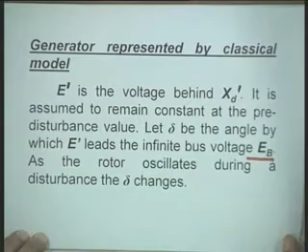Now, for this machine infinite bus system, we have derived earlier the power angle characteristic. Okay. To derive the power angle characteristic, we can start with the terminal current of the synchronous generator as E prime minus E b. Now, here we are representing the voltage behind transient reactance; if it is represented as E prime angle 0, then you can consider this as a reference voltage. Generally, we do it the other way around: we consider the infinite bus voltage as a reference, and the internal voltage leads the reference voltage by some angle delta. Okay. But it does not matter very much.

We can write down the expression for current I t. This is the first step for solving this problem, because whenever we start solving the problem, the terminal voltage of the machine will be known to us, right, and therefore, once the terminal voltage is known, we can find out the internal voltage by this formula: E prime equal to E t0 plus j times x t prime into I t0, where here we denote this total reactance x t as x d prime plus x e.

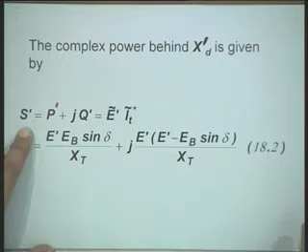Then the complex power behind x d prime is given by S prime is equal to P prime plus j times Q prime. Okay. This is E prime into I t conjugate, right. That is, the complex power is P prime plus j times Q prime, and this is obtained by multiplying this voltage E prime by the conjugate of I t. Okay. When you make these simplifications, you can write down the expression for air gap torque.

Now, we all know that in case we neglect losses, right, then the air gap torque is equal to the power output in per unit system. When you consider the per unit system, the power output at the terminal of the machine is the same as the air gap torque. Okay. And this is our standard power angle characteristic.

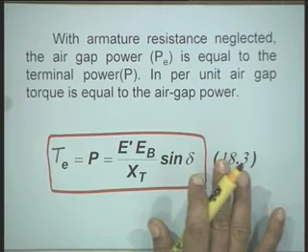Now, at this stage I would like to mention that in case instead of having a non salient pole machine, we have a salient pole machine, right, then the power angle characteristic will be different from what is given here. It will have another term which is known as the reluctance torque. Okay. And one can write down the expression for the power angle characteristic, but this is a primary requirement to start with.

The next step is you linearize the expression for air gap torque around an operating point. Our initial operating condition is characterized by the angle delta equal to delta naught. When you are operating and transferring a certain amount of power, right, the initial value of delta is delta equal to delta naught. Okay.

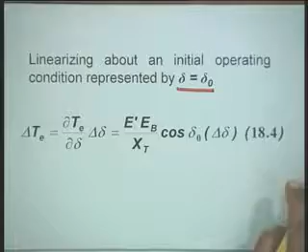The linearized equation is written in the form delta T is equal to partial derivative of T with respect to delta into delta delta, because this expression is very simple. T e is a function of one variable only here. We are assuming E prime and E b constant. Okay. The infinite bus voltage is assumed to be constant, the voltage behind transient reactance is assumed to be constant, the total line reactance is constant, and therefore the torque is a function of delta only, and when you obtain the small change in the air gap torque, delta T is equal to the partial derivative of T divided by delta delta into delta delta.

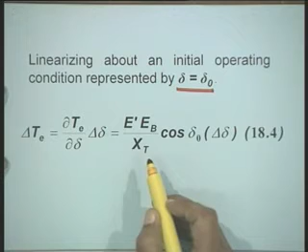Therefore, this partial derivative basically becomes the derivative term itself, right. There is no other parameter on which T depends. Okay. But in case these are also variables, right, then this term is the partial derivative with respect to delta. When you take other terms also, then you have to take the partial derivatives, and there will be so many variables. You have to keep taking all the variables, then you will have delta delta, delta E prime, delta I prime like this. It is actually the Taylor series expansion. We are trying to expand the equation around the operating condition, right.

Now, we come to the basic equations of motion. We had developed earlier the swing equation of the synchronous generator, and the swing equation is a second order nonlinear differential equation. This equation can be represented by two first order nonlinear differential equations. It will continue to be nonlinear. These two equations are written here as p delta omega r equal to 1 upon 2H into T m minus T e minus K d delta omega r, and the second equation is p delta equal to omega naught delta omega r, where delta omega r is the deviation of the rotor speed with respect to synchronous speed, right.

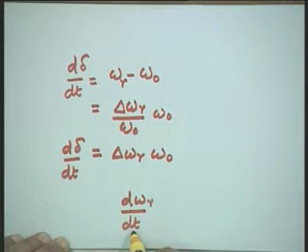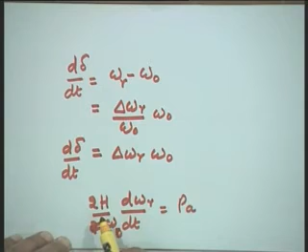See, originally our swing equation is of the form 2H divided by omega naught, d omega r by dt, equal to accelerating power. Now, when I express this omega r in per unit, this term is combined here, so that I have this coefficient equal to 2H only. That is, you write the equation in this form: 2H d omega r by dt equal to Pa. Here this omega r is in per unit.

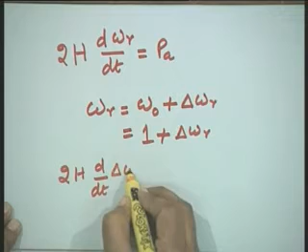Further, omega r can be represented as omega naught plus delta omega r. In per unit, omega naught will become 1, so you can put this as 1 plus delta omega r. Therefore, substituting this expression, I can write the equation as 2H d by dt of delta omega r equal to Pa. Since the derivative of this 1 is 0, d by dt of delta omega r is the same as d omega r by dt.

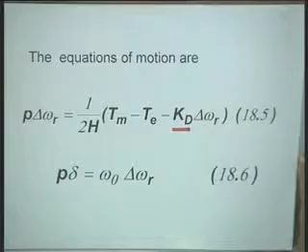And that is why, in the original swing equation which we have written here, which is not a linearized equation, we can write down this delta omega r. Is it clear? These two equations are very important, because when you solve a given problem, it is very important to understand how the quantities are expressed, what quantities are in per unit, what the unit of time is, the unit of delta, the unit of speed deviation. All these terms are very important.

Okay. Now, this equation is in terms of small variations of speed, angle and mechanical torque. And therefore, we can take the Laplace transform of this equation. When you take the Laplace transform, it will become: s times delta omega r(s) equal to 1 upon 2H (delta Tm(s) minus Ks times delta(s) minus Kd times delta omega r(s)).

That is, in this equation all these variables are the Laplace transform. Okay. And therefore, now what we can do is that we can write down delta omega r(s) as 1 upon 2Hs times this whole expression. Okay. Now, this equation is represented in the block diagram form here.

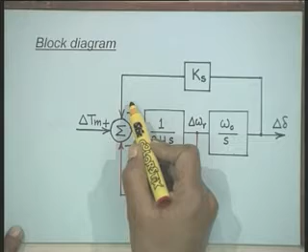At this summation point, we have delta Tm, Ks times delta, that is your delta Te, and Kd times delta omega r. Now, when I represent this in the block diagram form, all these variables are the Laplace transform, but for the sake of convenience we may not write delta as delta with s, okay.

But we understand that in the block diagram or in the transfer function model, all the variables which we represent are the Laplace transform of the original variables, okay. Delta Tm also is delta Tm(s). Therefore, this is the summation point where we derive a quantity which is given in this bracket: delta Tm minus Ks delta minus Kd delta omega.

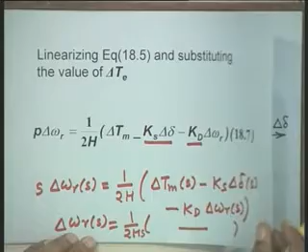Now, this quantity, when it is multiplied, now here it is 2 times Hs. When you multiply this by this block 1 upon 2Hs, right, we get delta omega r here. Okay.

Now, the next step here is to linearize the second equation. Our second equation was P delta equal to omega naught into delta omega r. Actually the delta can be written as delta naught plus delta, and therefore P delta is the same as P delta, because delta naught is constant. That is, if you take the derivative of this term, d delta by dt, then this comes out to be the same as d delta by dt.

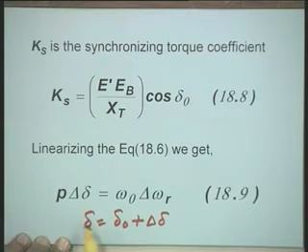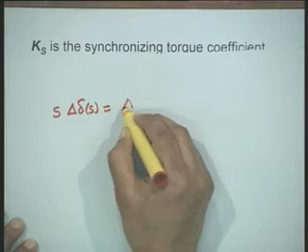Okay. Now, if you take the Laplace transform of this equation, then it will be s times delta(s) equal to delta omega r(s) into omega naught. Therefore, I can now write down delta(s) equal to omega naught by s into delta omega r(s). Okay.

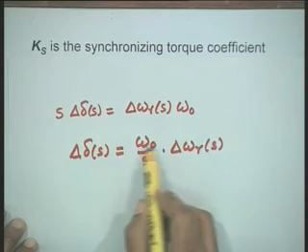Therefore, the speed deviation, right, is related to the angle deviation by this transfer function omega naught by s. Okay. And therefore, in this block diagram, this transfer function omega naught by s relates the angle deviation, that is delta, to delta omega r.

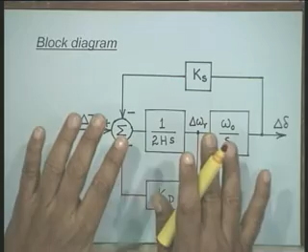Okay. And therefore, this block diagram is extremely important to understand the small signal stability of a power system, because we will be developing the complete model including additional blocks to this basic block diagram, right. Now, the next step to understand the whole thing is that we develop a characteristic equation of this system, right.

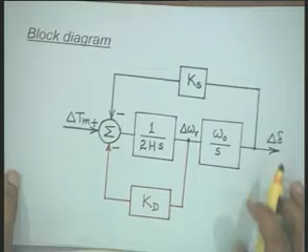Now, to develop the characteristic equation, we can make use of this block diagram and relate this output delta delta to the change in mechanical torque. This is the input, right. Therefore, if you look at this block diagram, input is change in mechanical torque, output is delta delta. Therefore, this is a single input single output system.

Okay. Normally they call it SISO, single input single output system, and you can simplify this model and obtain a simple transfer function relating delta delta to delta Tm. That is, first we write down delta delta as omega naught by s, 1 upon 2Hs, into this whole quantity, which is delta Tm minus Ks delta delta minus Kd delta omega r.

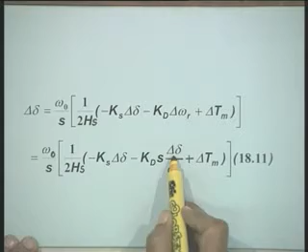Okay. Now, in this equation we replace this delta omega r by delta delta upon omega naught into s, right, because this relationship is there in the block diagram. You can see this block diagram relationship, delta delta is equal to omega naught by s into delta omega r, right. So, when you look at this equation, we have now delta Tm, delta delta and other constant terms. Okay.

And therefore, when you rearrange the whole thing, you can write down the equation in this form: s squared delta delta plus Kd by 2H s delta delta plus Ks upon 2H omega naught delta delta equal to omega naught by 2H delta Tm, right. Now, when you equate this expression to 0, we get the characteristic equation for the system. This is the input term, right. Therefore, to obtain the characteristic equation, we can use this expression.

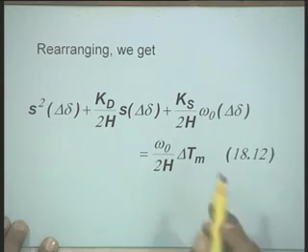Therefore, the characteristic equation is in the form S square plus K d by 2H S plus K s omega naught by 2H equal to 0. Since the system which we have considered is a second order system, the characteristic equation is also a second order characteristic equation. Now, you can see here the coefficients are depending upon the damping term K d, the system inertia constant H, and the synchronizing torque coefficient K s. These are the system parameters.

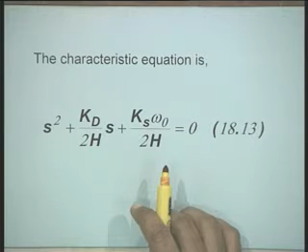Further, you can easily see that K s depends upon the operating condition. It also depends upon the line reactance, because for this single machine infinite bus system, the expression for the synchronizing torque coefficient is E prime into E b divided by X t into cos delta naught. And therefore, in this characteristic equation the coefficients are a function of loading, that is the system operating condition, and system parameters also. X t depends upon the line reactance, and similarly on the direct axis transient reactance.

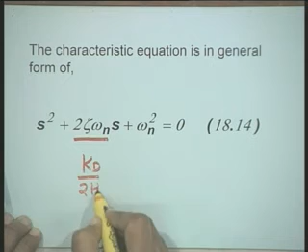Now, this equation is similar to our standard equation in this form, S square plus 2 zeta omega n S plus omega n square. You can identify that the coefficient 2 zeta omega n is equal to K d by 2H, while the omega n square term is equal to K s omega naught divided by 2H.

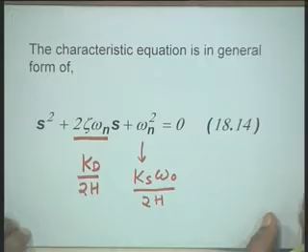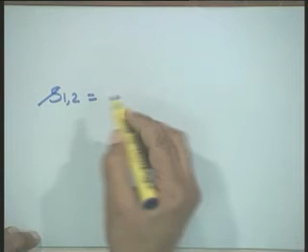Now, when you obtain the roots of this characteristic equation, the roots can be written as s1, s2 equal to minus zeta omega n plus minus j omega n square root of 1 minus zeta square. That is, whether the roots are complex conjugate or real will depend on the value of zeta. If zeta is greater than 0 and less than 1, we will get these two roots as complex conjugate roots.

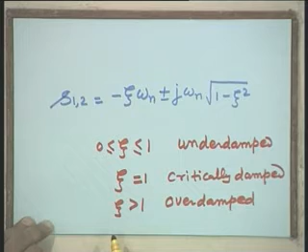A system whose zeta is greater than 0 and less than 1, we say that this system is underdamped. A system whose zeta is equal to 1 is critically damped. A system whose zeta is greater than 1 is overdamped. And a system whose zeta is less than 0 is unstable. It has negative damping.

In any system, we have to ensure that the damping is adequate, so that the oscillations which are generated are damped out. Whenever we design the controller for the system, we have to achieve certain minimum damping for all the modes which are present in the system. Now, here we can also give some more interpretation to the damping term zeta.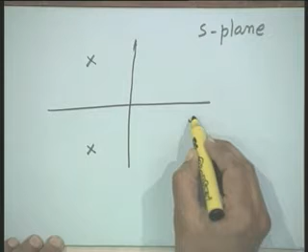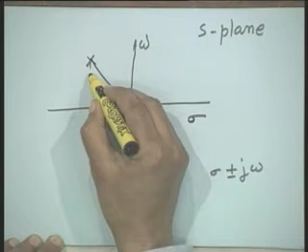If you plot these roots in the S plane, assuming that damping zeta is positive, here we show the real part, we call it sigma, and omega on this axis, and any root is written as sigma plus minus j omega. Now, if the system is stable, having its complex conjugate roots lying in the left half of the S plane, then this term can be written equal to zeta omega n,

while this term will be equal to omega n square root of 1 minus zeta square. What will be this quantity? Omega n. Therefore, omega n is the distance of the root from the origin. Now, if you look at this angle theta, then cosine theta is equal to zeta.

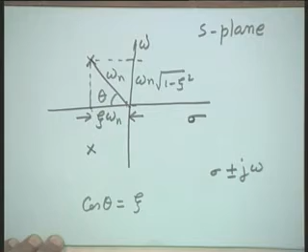Therefore, whenever we perform eigenvalue analysis of the system, we can draw in the S plane a line which will represent a certain value of zeta. Suppose this is your S plane, and this line represents zeta equal to 0.1, this line will represent zeta equal to something more, 0.2, like this. Now, in case all the roots lie on this side of this line, it means there is no mode whose damping is less than 0.2.

Therefore, whenever we design the control for improving the system stability, particularly AVR tuning or power system stabilizer tuning, we perform root locus analysis and vary parameters like gain setting to get the optimum performance, but at the same time ensure that no root has its damping less than the desired value. Therefore, this is a very important way to ensure that we do not reach a stage where any of the roots has its damping less than the desired value.

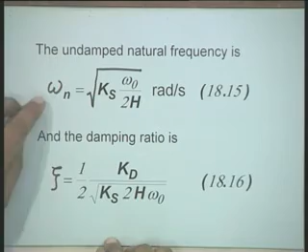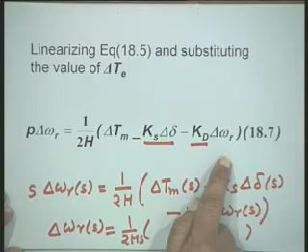Now, the next point which we will study: see the two linearized differential equations which we have derived. One differential equation was written in this form. Similarly, we had written the second differential equation in linearized form. Now, you can arrange these two differential equations and write the model in vector matrix form. For analyzing the stability of the system, the most convenient form of representing the model is vector matrix form, that is, x dot equal to A x plus B u.

These two equations can be arranged in this form: d by dt of delta omega r equal to minus K_D by 2H delta omega r minus K_S by 2H delta delta plus 1 by 2H delta T_m. The second equation is d by dt of delta delta equal to omega naught into delta omega r. Therefore, these equations can be written in vector matrix form, and when we make use of, say, MATLAB for analyzing system performance, we can find the eigenvalues of the system matrix A for studying the stability characteristics of the system.

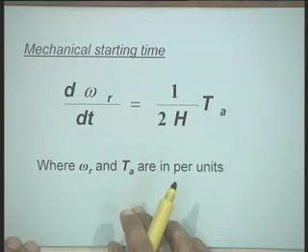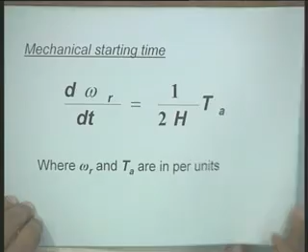Now, one more important piece of information: the importance of the term 2H. Let us look at our swing equation again: d by dt omega r equal to 1 upon 2H T_A, where omega r is in per unit. Suppose you have a synchronous generator at standstill, zero speed, and you apply rated torque. In how much time will it attain its rated speed? It can be obtained by integrating this equation, assuming T_A equal to 1 per unit.

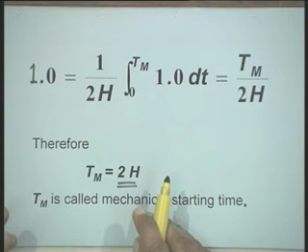The synchronous generator will attain its rated speed starting from 0 when applied with rated accelerating torque, T_A equal to 1 per unit, in time 2H, which is therefore denoted as the mechanical starting time of the synchronous generator, T_m equal to 2H. In the model we have the term 1 upon 2H, so 2H is similar to a time constant. In literature this T_m is often represented by the symbol capital M, so the block 1 upon 2H s is also represented as 1 upon M s.

Here we should not get confused with M, the angular momentum of the rotor. M in this model equals 2H, the mechanical starting time of the rotor when subjected to rated torque. Similarly, if the machine is running at rated speed and you apply a retarding torque equal to rated torque, its speed will come down to 0 in a time equal to 2H. That tells how much time the machine takes to retard from rated speed to zero speed.

Therefore, with this I will conclude my presentation by saying that we have developed a linear model of a machine infinite bus system considering constant field flux linkages. We have also studied the importance of the damping ratio zeta, and whenever we design the system, zeta is going to be one of our design parameters.